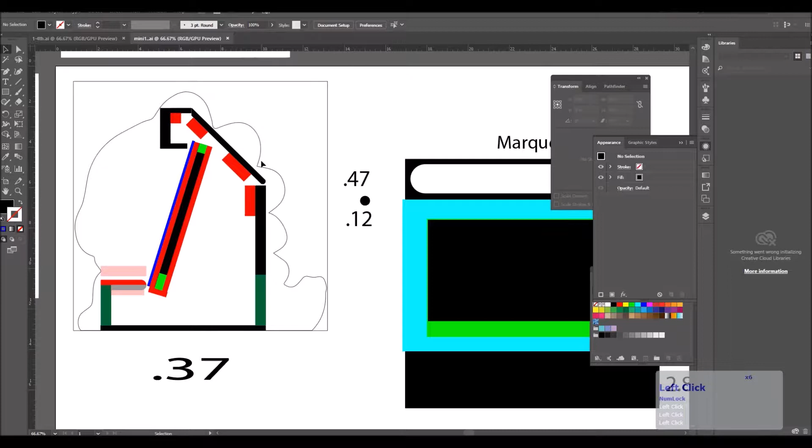We have the magnet holes for the back piece. So we're essentially routing the underside of this piece, because the magnets will go here and it'll match these support pieces here.

Now we have 2 circles here, and that is for the fans. Our fan is around 44 millimeters squared, and I would say that this middle circle is more or less where the blades are going to be spinning.

So since this is the underside, we're going to cut out the middle part, and we're just going to have 2 holes left, and that's where the fans are going to go with 4 screws.

But to cover this hole, I'm going to be using tiny speaker grills, which is what the other circle represented, with some screws. That way it won't be seen, and it'll give us airflow in and out.

We have the base, which is just going to be... and I need to correct this because this is not the correct dimension. So our bar top base is 8 by 12.47, because that is the dimension of our bar top.

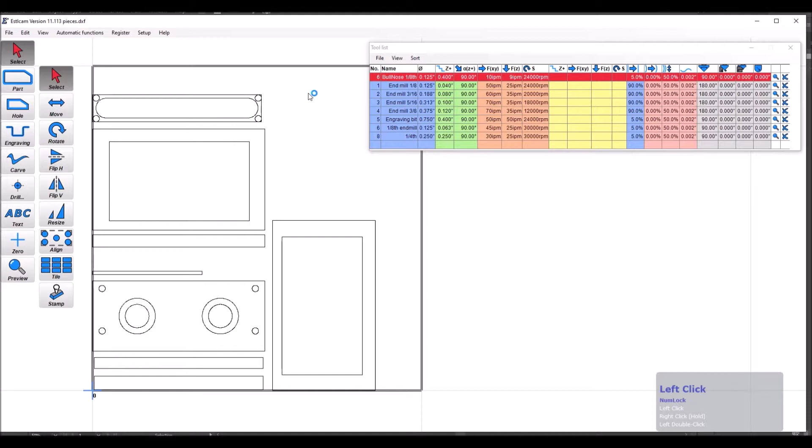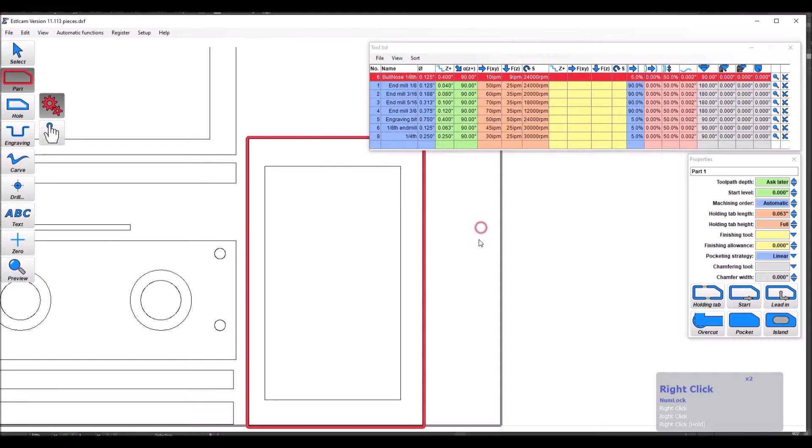Okay, we're now on Estlcam and we're ready to set this up for the CNC router by creating the tool paths. So first we'll start off with the monitor frame. Since it is a big piece, we're gonna want to add holding tabs, and I'll add some on each side.

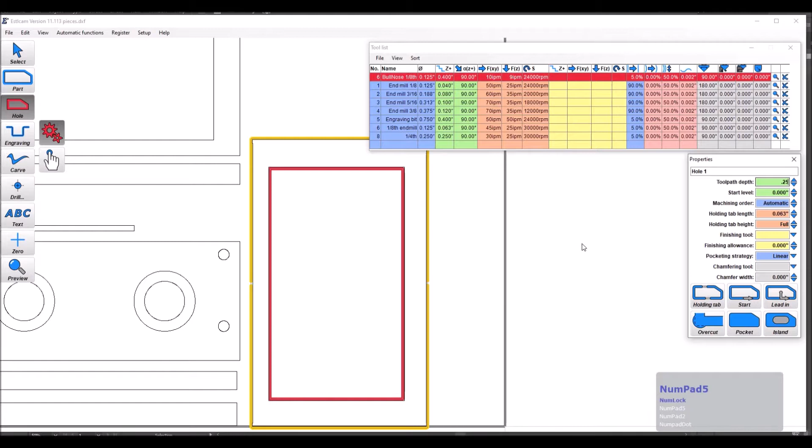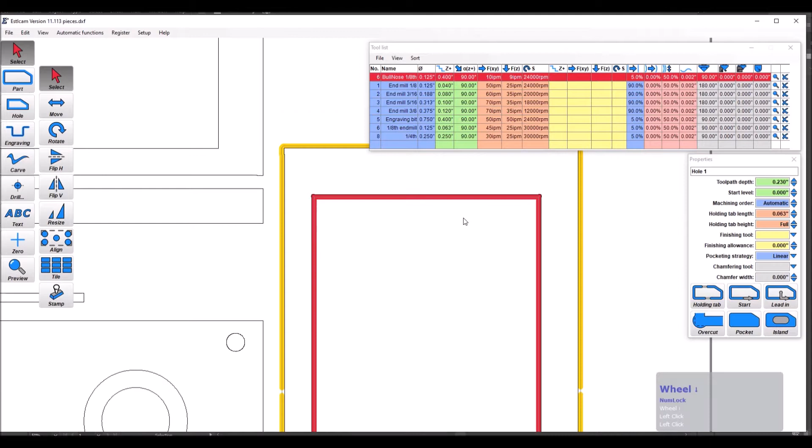We're gonna choose to hole out the middle, and that's gonna be... I'm just gonna set it to 0.25 right now, but I don't remember what it was. I think it was 0.23. We'll have to go back and double check, but regardless, the bit cannot get into these corners, so we need to add overcuts. So, automatic functions, add corner overcuts, just hit OK, and you can see those right there. That's so our screen can be seen without the edges clipped off, although I think the difference is too little to really make a big difference.

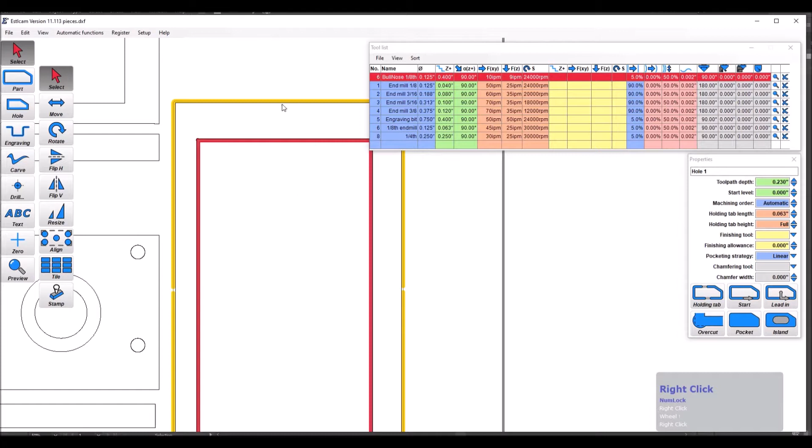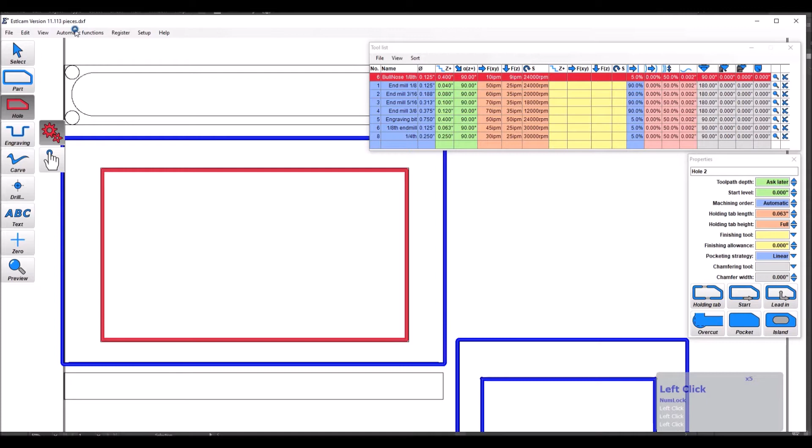So that piece is done. We'll set this to 0.23. And that's it for this frame. To the other one, part at 0.23. Hole out this one, add corner cuts. 0.23.

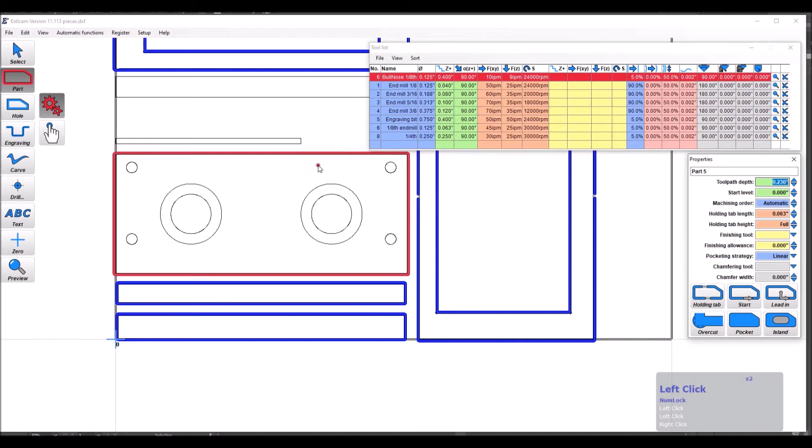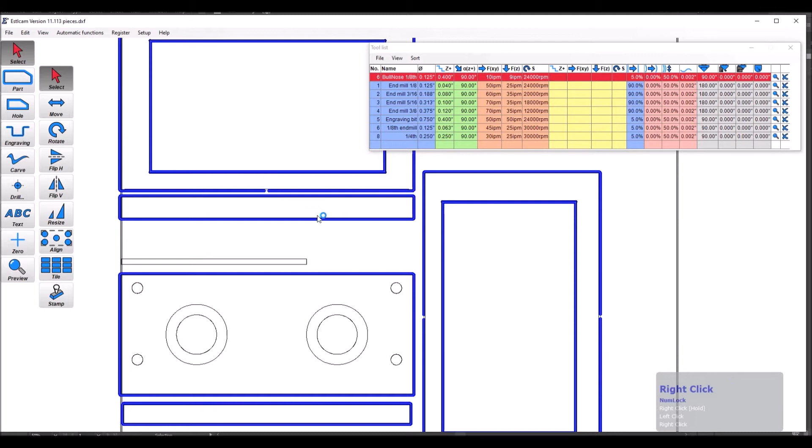Okay, starting on the bottom, we need to part this one out, 0.23. Part this one out, same. We're gonna ignore this piece for now. Part this one out. Part this one out. Let's add the holding tabs, one on top and bottom. We'll select this piece, add holding tabs, top and bottom.

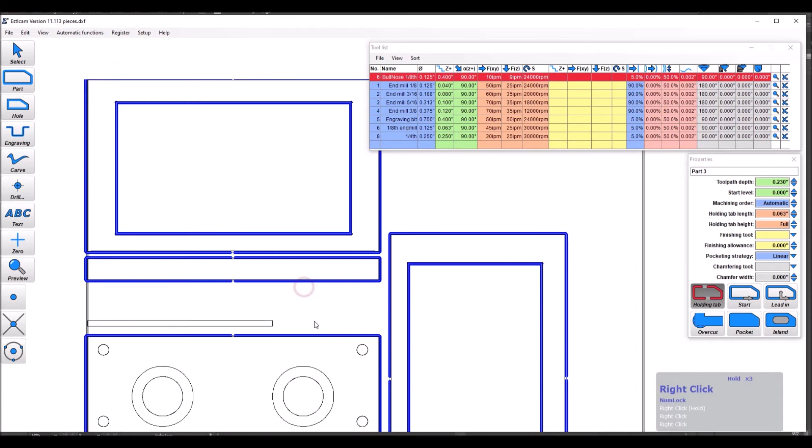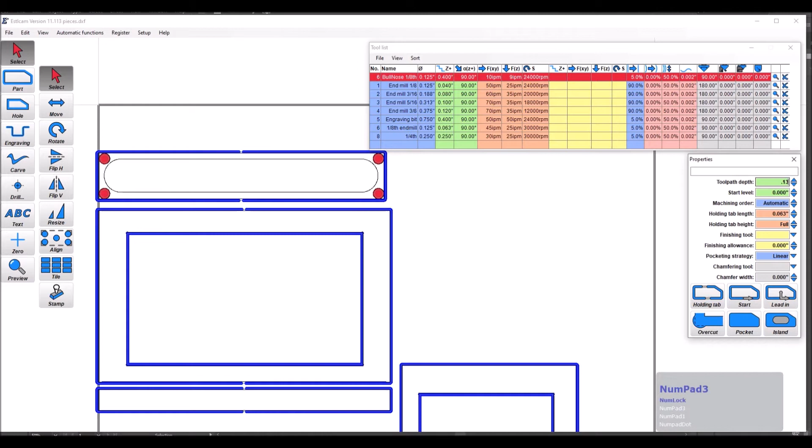Okay, on this one, we need to set the depth. Anytime it's yellow, you're missing some information. We're gonna hole this one out. All of these, select them all, holding shift key, pocket those, and we're going to choose to pocket 0.13. And we need to hole the middle part out, and that's also going to be 0.23. Okay, so that's it.

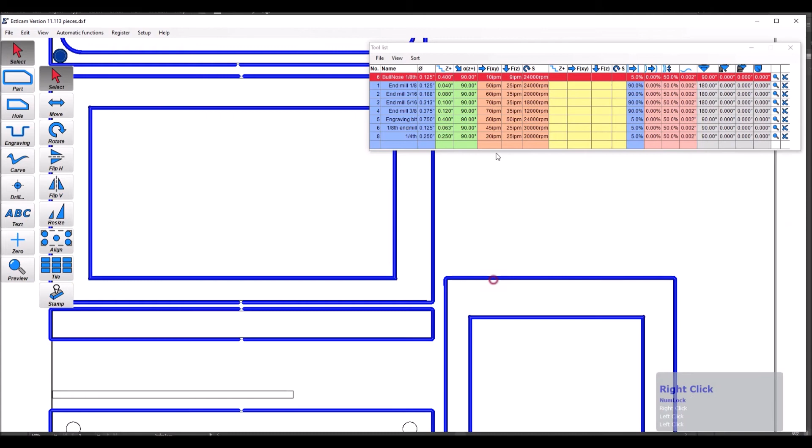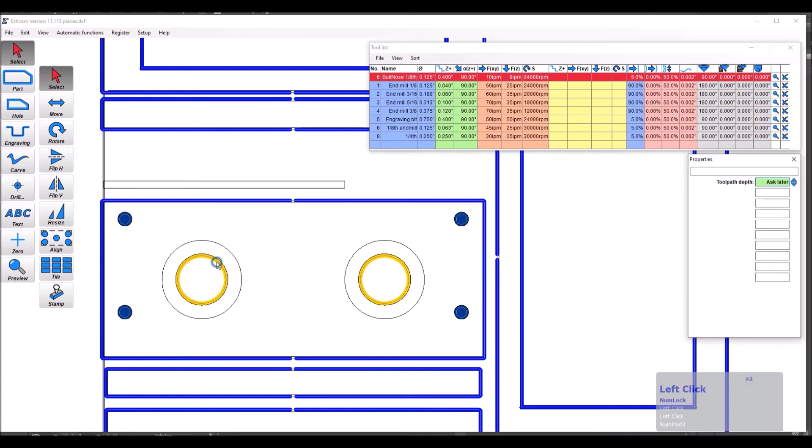Okay, we need to pocket these. We'll select this one, pocket that by 0.13. And then select the inner circles, and these are gonna be 0.23. So this is gonna be cut out. This piece will be cut out for our fans. This is a speaker grill.

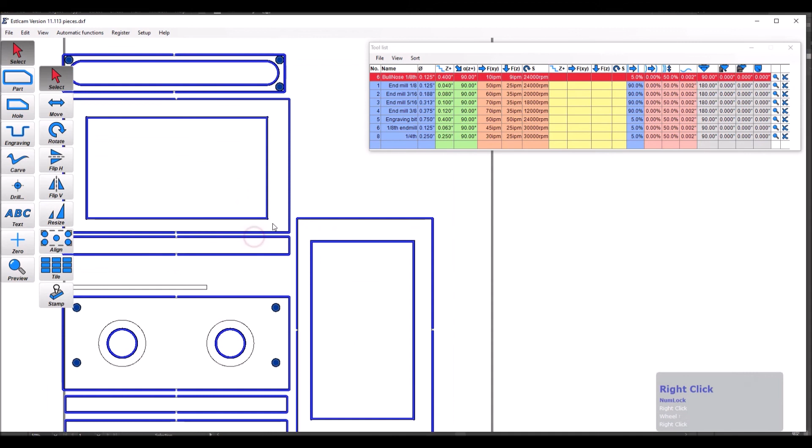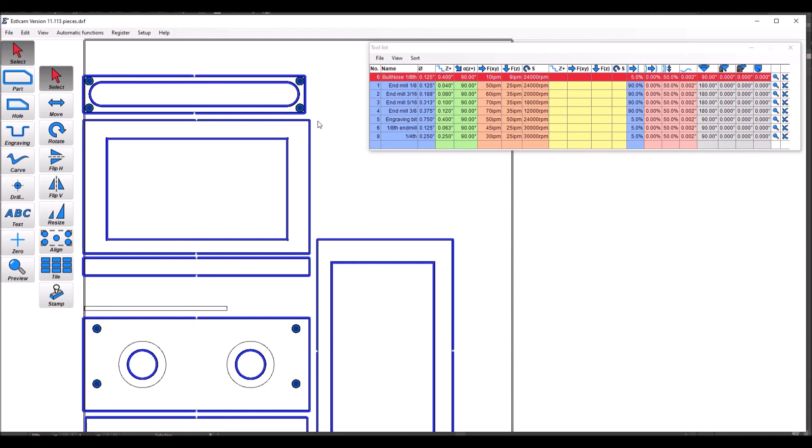And so that is how the top back piece is gonna look. And those are pretty much all the pieces except the base. So from here, we're gonna take it again to the router and cut out all of these pieces for the quarter inch material. After that, the only thing left is the bullnose bit on the edge and the 45-degree angle cut on this piece right here. And then we also need to route the T slots for the T molding on the machine.